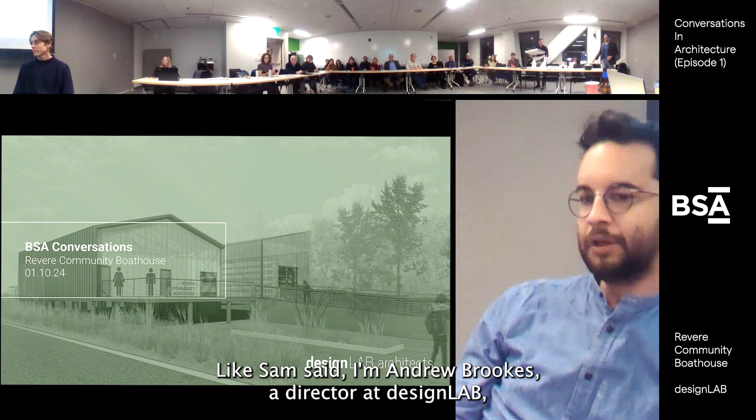So briefly, this is a pretty small project, but it is very important to the city of Revere, and it's also part of a much larger and very ambitious project that the city has, and we'll go over all of that.

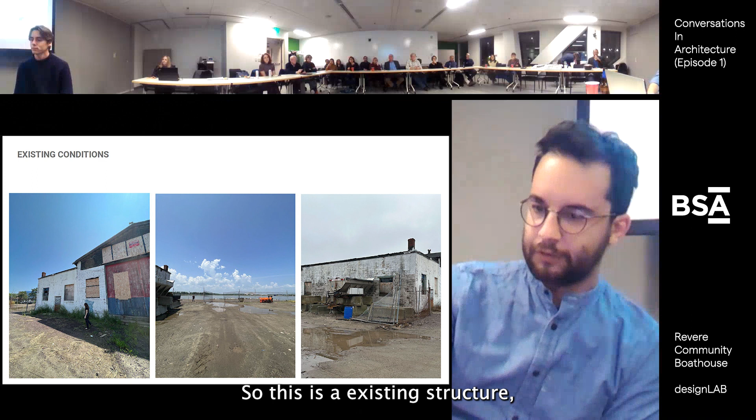So this is an existing structure, barely, and there's a lot to talk about in terms of what's existing and what's there to be removed. It's an existing brick building. I think nobody's been in the building for maybe 20 years. So it's really used for storage right now. There's some parked cars in there, and vandalism - it's a good place to spray paint if you want to.

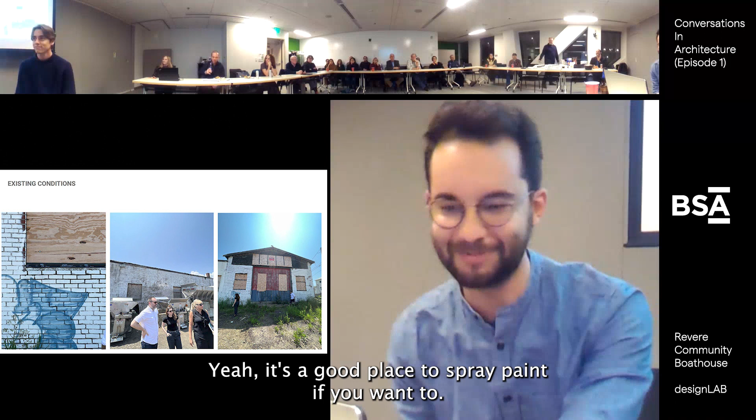There's the original building, which is the gabled building, and then there was a CMU addition put on the side, which is this middle building. There's heavy deterioration everywhere - basically anywhere you look, something's deteriorating inside or outside.

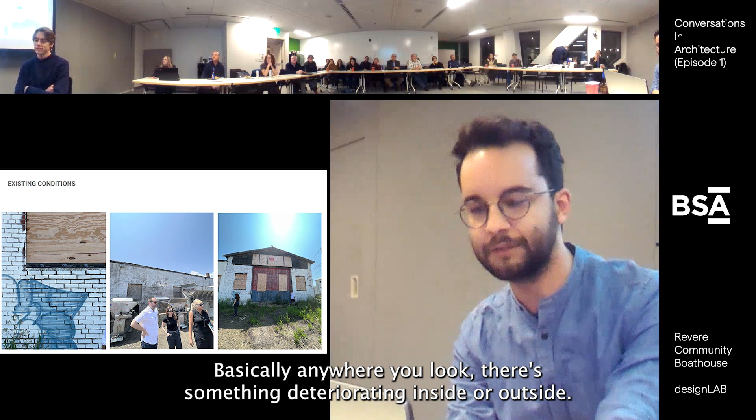This is the inside. It's currently storing some sort of oil truck or something. There is a lot of nice detail in the building - a lot of artifacts from the original character and the original program of the building, which was a boathouse. They used it to repair boats.

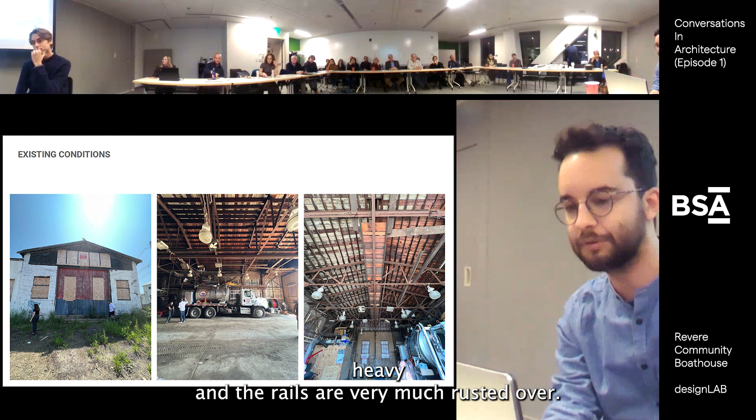There's rails in the floor that used to go into the water so you could bring boats into the building. There are these huge sliding doors that are incredibly heavy, and the rails are very much rusted over, so you can't actually move the doors very well. But there's all this nice detail in there that doesn't exist in too many places except a well-deteriorated building - but it's all holding itself up. The brick isn't structural; it has a nice delicate structural series of members to it.

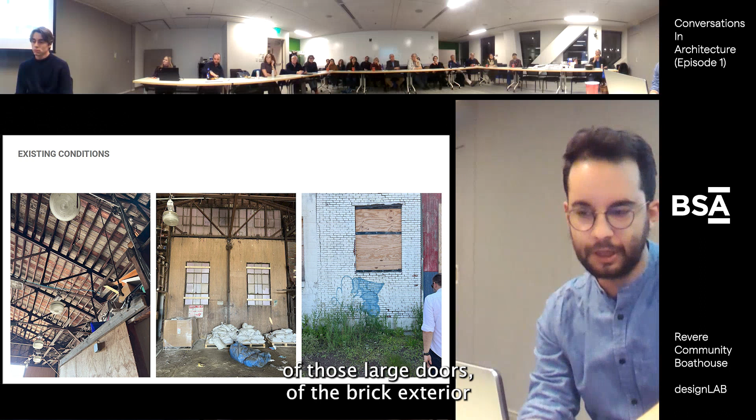Just some more pictures of the interior, of those large doors, of the brick exterior.

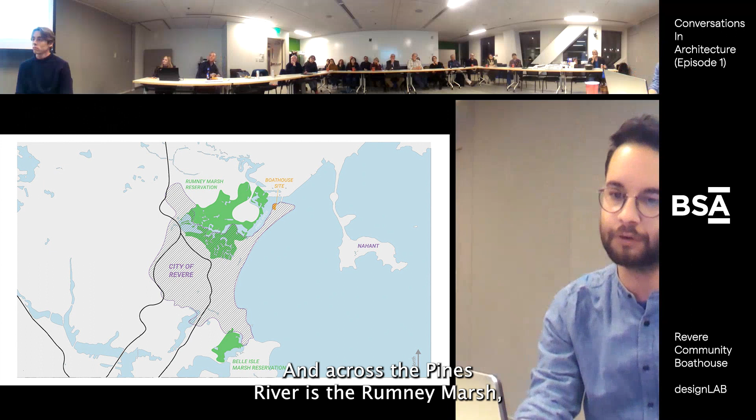I don't know if anyone knows the boundary of Revere - it has a pretty unique layout, kind of self-gerrymandered. The boathouse sits right on top of the wing that sits between the ocean, the bay, and the Pines River. Across the Pines River is the Rumney Marsh, which actually has a deep history and is very large and quite beautiful. There is a very large recycling plant or trash plant right in the middle, unfortunately, but the views from the marsh, from the boathouse, are quite nice.

And then, of course, Revere also has the first public beach in the country, which is very close to the boathouse site. So there is a deep history to this site and to the city of Revere that has kind of slowly been lost or taken over by either climate change, industry, or the highway.

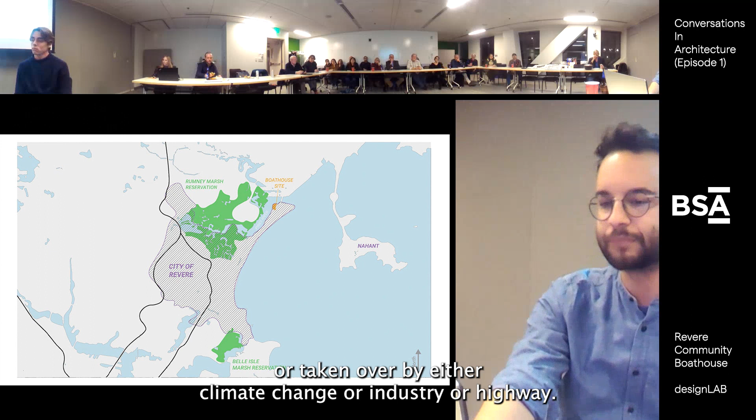So this is our site. The boathouse is here, a big white building. There was a boat yard next to it, currently storing lobster traps, which are amazingly part of the project. That was something we had to deal with.

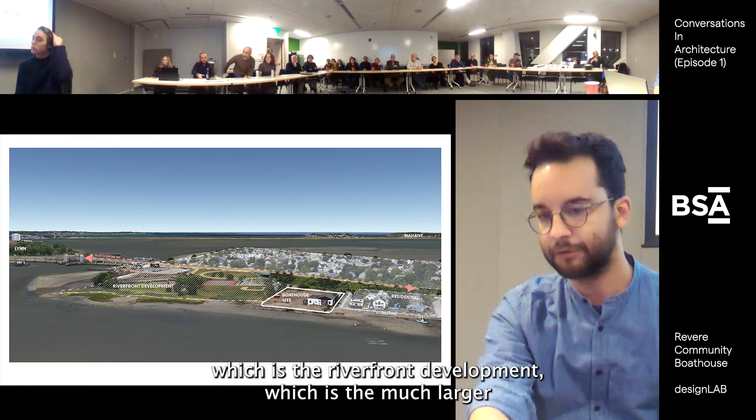Then there's a soft residential neighborhood next door on the right. There's the North Shore Road, which is overwhelming and separates the neighborhoods, and it's quite hard to access the neighborhoods, the boathouse, and this larger site, which is the riverfront development.

This community building is just a small part of that larger project. Our scope of work is actually just the footprint of the building and the addition, but we have to consider the wants of the rest of the site and the requirements of the rest of the project, because it's very ambitious and a big part of the future of the city of Revere.

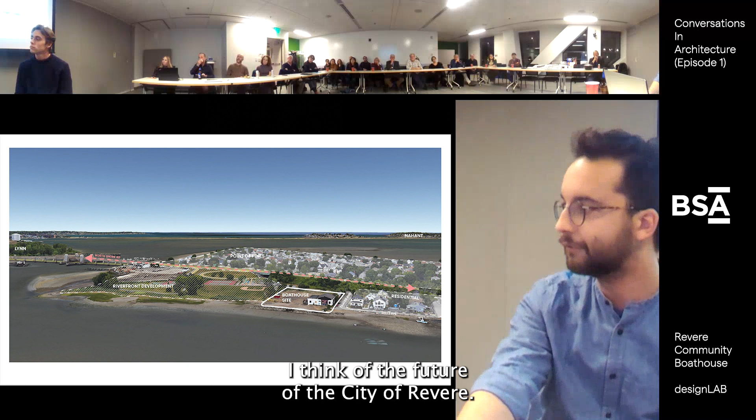So this is the view from the other side. You can see our building here in the middle and the Pines River. And of course, the Rumney Marsh is overwhelming the rest of the views there.

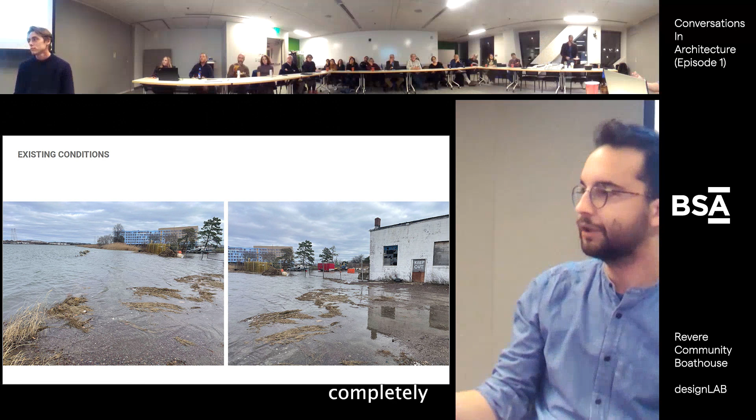These photos are actually from this morning. So this is the addition here. This is a bit before high tide, I think these were taken at 10:30. High tide was at 11 o'clock. The whole rest of the neighborhood was also underwater twice this week. So it's a huge problem.

It could ultimately take over the rest of the city, or at least this neighborhood. And this building has already been taken over by this effect. So the city has much larger plans to solve that flooding problem with revetments and solutions.

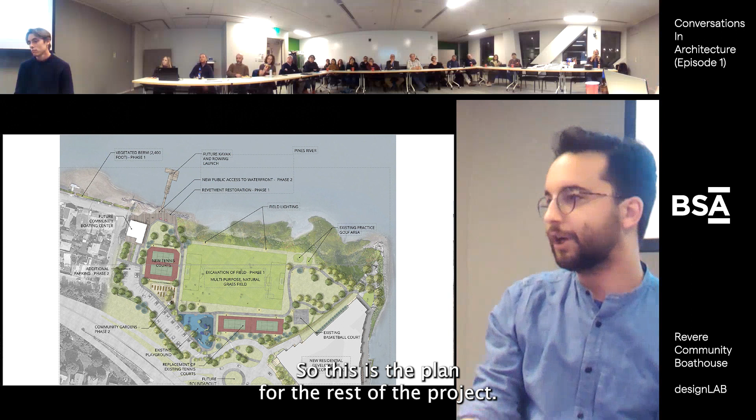So this is the plan for the rest of the project. We were not involved with this planning, but it's very ambitious and also kind of wonderful. They took on this amazingly large project to save this neighborhood from flooding, as well as provide extremely needed community amenities.

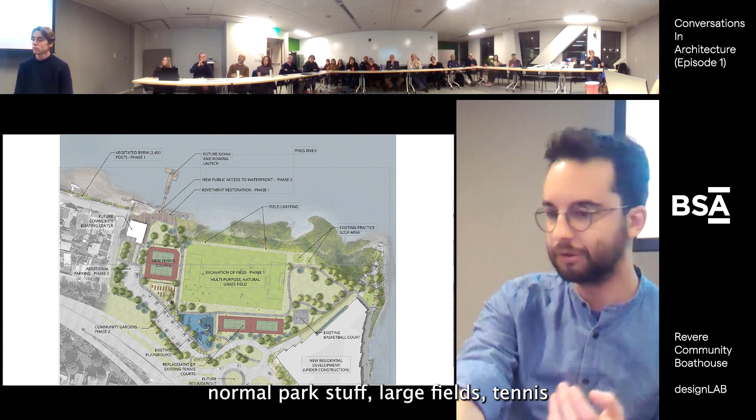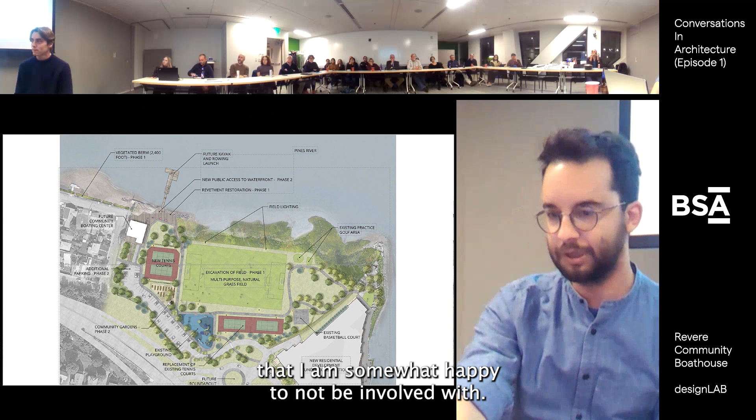Kind of normal park stuff: large fields, tennis courts, parking, access to this site, and new residential development. But the hardest part is building the vegetated berm up here, which comes right to the edge of our building, to protect the rest of the neighborhoods. It's an amazing permitting process that they're going through, which I'm somewhat happy not to be involved with.

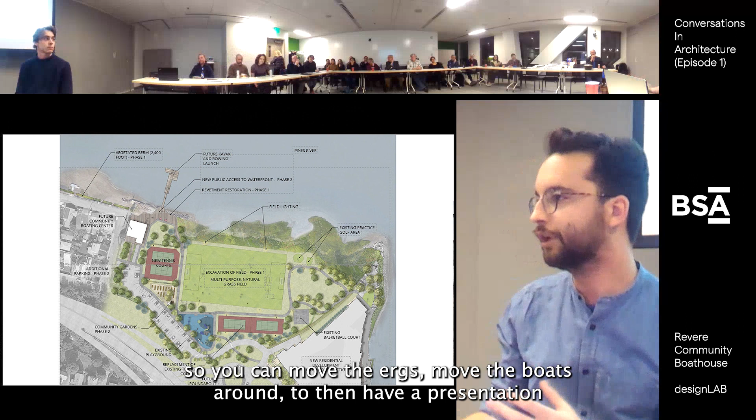Our project is this small white building here, connected to these raised platforms and a dock for rowing boats, kayaks, and potentially sailboats as well. That's the program of the building: a community building that is mostly a boathouse, but can be flexible enough to have an event like this inside, where you can move the ergs and boats around to have a presentation within the building.

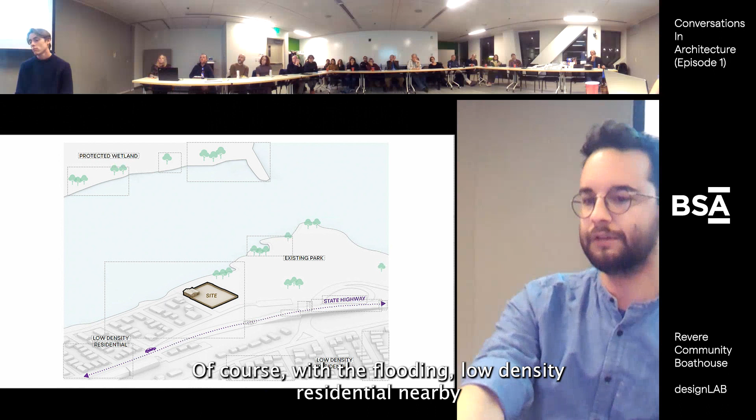But we always look at the site before starting the design. So we have this low-lying site with the flooding, low density residential nearby, existing park on the other side, but none of it's really activated. It's all cut by the state highway, which makes it very difficult to access.

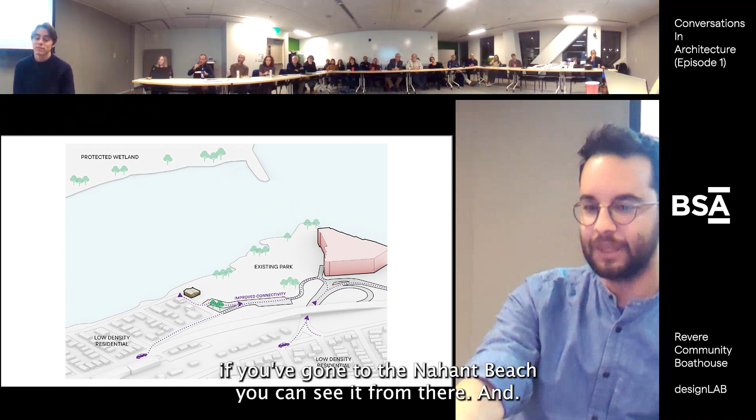So the city is working on a large development on the far side, which if you've driven up this road, you've 100% seen. If you've gone to Nahant Beach, you can see it from there. That connectivity is hard, and bringing all those people will be difficult, so they're going to improve the connectivity, which will provide our project with significantly more access and pedestrian traffic.

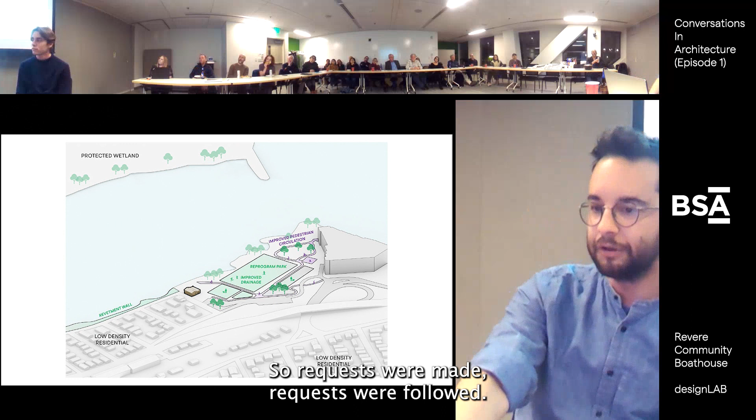There'll be new program on the park, new accessible, much needed program. Of course there was a large community process involved, so requests were made and followed. There's also the revetment wall, the vegetated berm, which was not a request but was needed, and was actually pushed back against by the town, but is much needed to save that neighborhood.

And then you can start to see how our building sits right in the middle of these improvements, and it almost starts to act as a gateway.

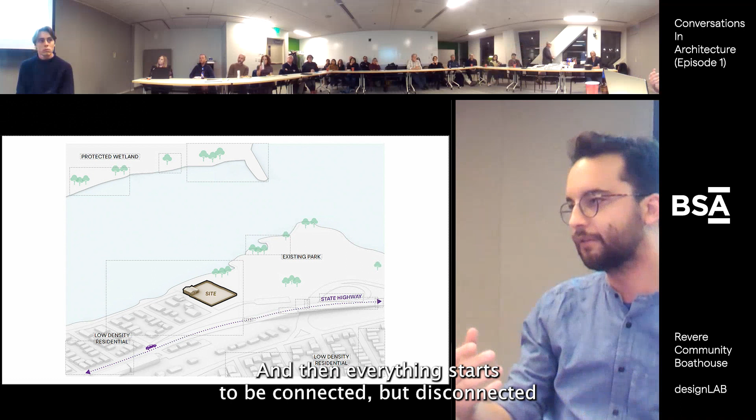Gateway to the water, gateway to the parks, a gateway to even the residential neighborhood. And then everything starts to be connected, but disconnected from the highway. So it's starting to bring everything together, and we start to see this community room boathouse as this gateway, or this opening into the park, or from the park to the rest of the neighborhood. And that's how we started to...

View this project. It's just an interesting juxtaposition between the new and the old, just like any project, but it's exciting to see.

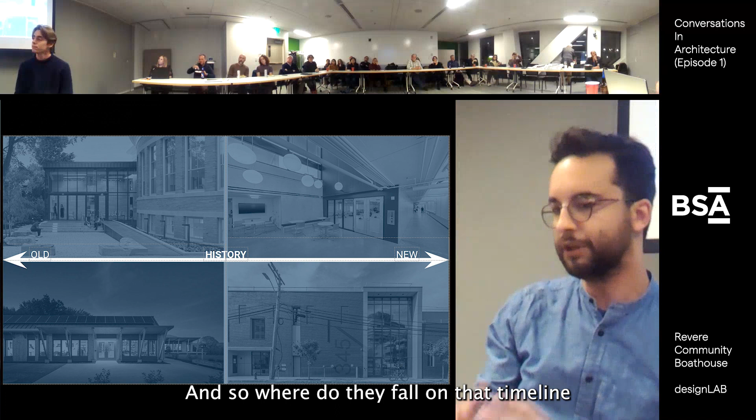But then we put the designLAB layer on top of that, and how we view most of our projects. We work on a lot of historic projects, or a lot of old projects. Historic and old may be different, so where do they fall on that timeline? That's that disposition, and then also where do they fall within the environment of constructed or organic? We've classified those four quadrants into historic, modern, natural, and utilitarian. And nearly all of our projects fit into this. I like to think that it's not post-rationalized.

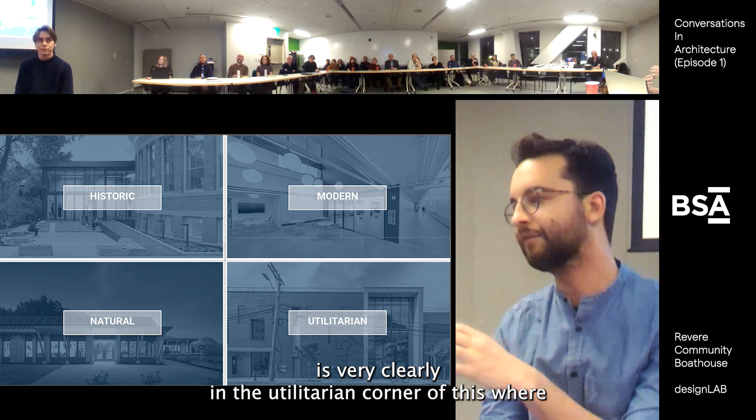And this project is very clearly in the utilitarian corner of this, where it wasn't built for architecture, it was built for a need. So there's a lot of utilitarian qualities to the building, but there's not a lot of architectural necessity currently.

So now that's kind of the overall view of a bit of how designLAB looks at it, a bit of the site. Rand's going to walk you through the massing and the design a bit.

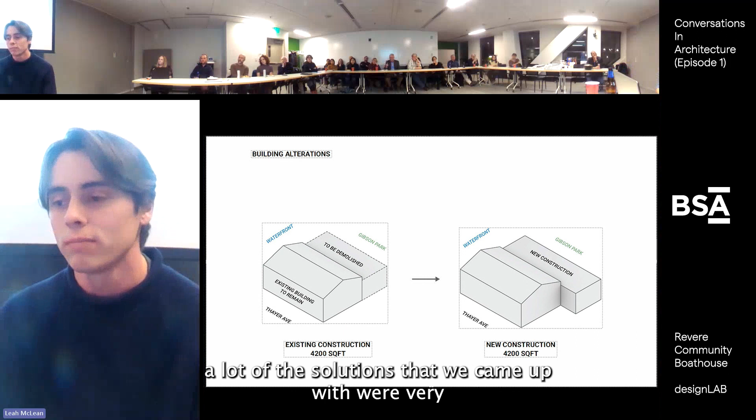Yeah, so speaking towards the utilitarian aspects of the building, a lot of the solutions that we came up with were very utilitarian and pragmatic. So here you can see we already spoke about how the CMU addition that exists currently, that's going to be demolished, and we're going to put a new volume that's roughly the same square footage, but is actually a little bit skinnier but longer.

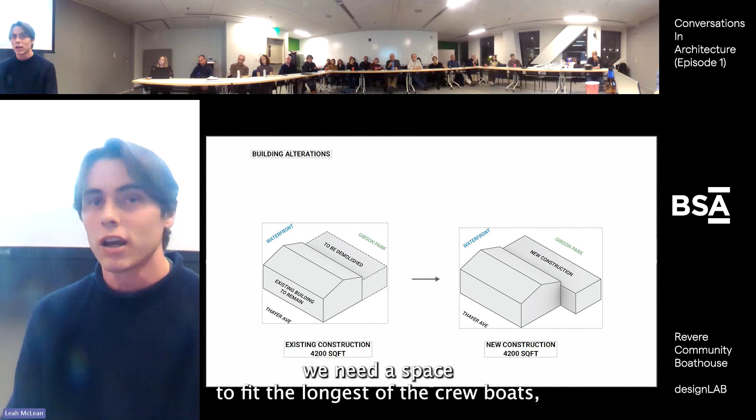And the reason for that massing is because we need a space to fit the longest of the crew boats, which I think is like 60 something feet long, so pretty long. That was the main driver behind the addition. And we'll get to why the addition.

Here you can kind of see, you guys saw the photos. Brooke said barely an existing structure. All of the masonry was basically unsavable.

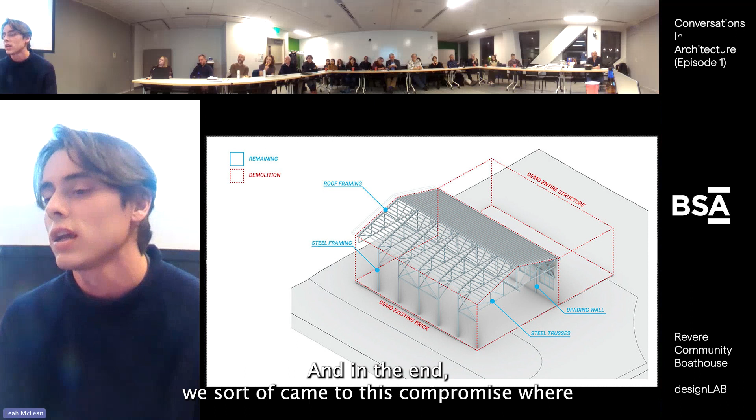We went through a series of iterations trying to see how we could save the brick and whether that was really worth it for us. In the end, we came to this compromise where we wanted to keep the stuff that was in good condition. Since the masonry brick wasn't structural, that gave us this opportunity to save what's actually integral to the building, which is the steel structure and the interior brick wall.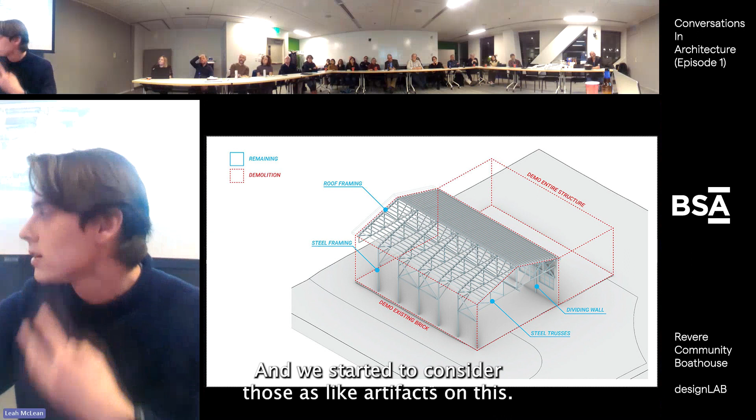So we get to actually save some of the utilitarian aspects, the very core of the building we actually got to save. And we started to consider those as artifacts almost inside the building. There's hooks and rails and stuff that you can ultimately see the story of.

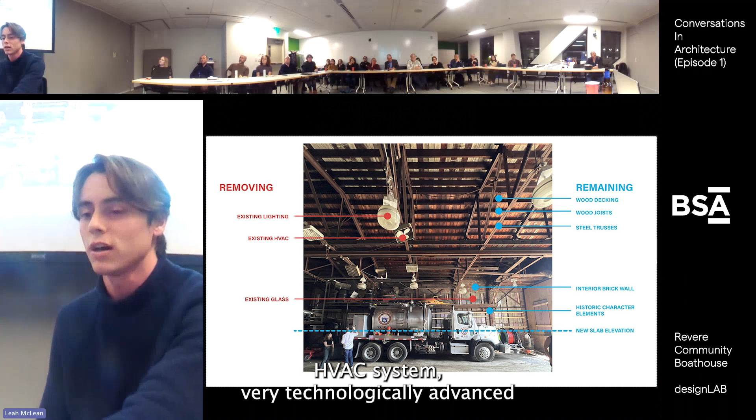Yeah, so here's some photos of just the interior, and you can kind of start to see some of those artifacts, like very nice steel trusses, very nice roof decking, very nice HVAC system, very technologically advanced, state of the art.

Yeah, obviously the lighting and pretty much everything comes out except for what we thought was integral to the character of the building. And then you can see our dotted line here where we actually had to raise the slab elevation by 5.5 feet due to the flooding.

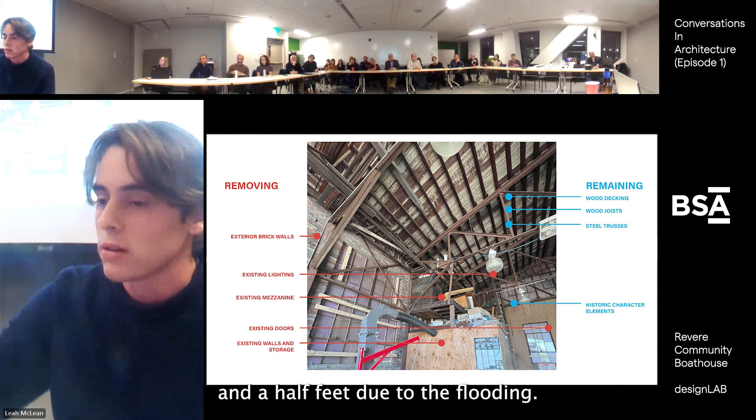Yeah, so here you can see some other elements, start to see some of these artifacts. There's all sorts of hoisting mechanisms and pulley systems and stuff. A big part of our design process was trying to keep everything that we could.

Obviously the plywood walled bathroom had to go. We fought to save it, but...

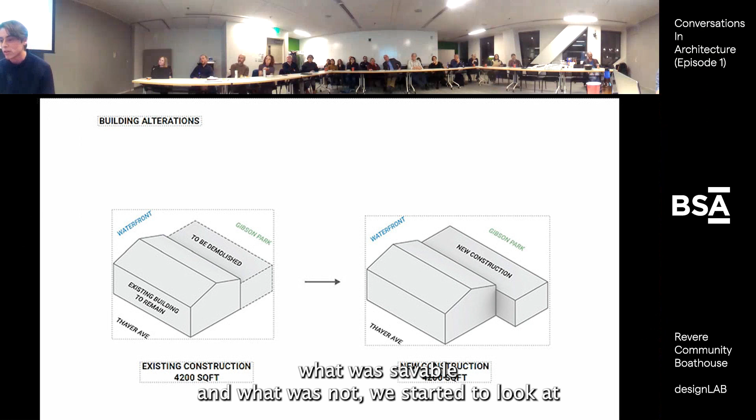Yeah, so after we kind of figured out what was savable and what was not, we started to look at how we were going to program this space, and how we were going to fit the things that we need in the building. And so we came up with this...

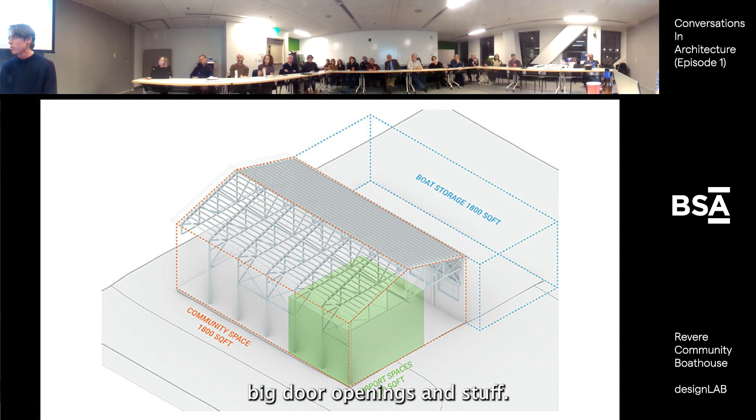Compact volume of basically all of the support spaces for the community space and the boat storage. We sort of just fit them here. We initially went through a couple of iterations trying to work around some of the big door openings and stuff, but once we realized that the exterior walls were basically shot, we kind of got a break in that regard. We're able to manipulate the interior space a little bit more. So you can see how that works out in plan, with all of our support spaces tucked away nicely in the corner.

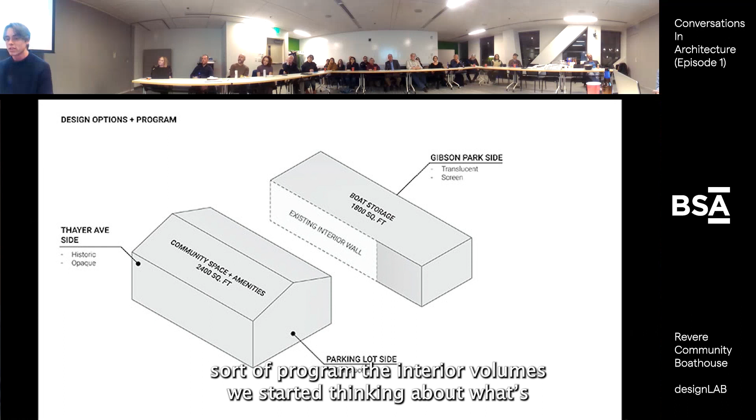After we programmed the interior volumes, we started thinking about the character of the exterior of the building. We came up with a matrix of different options, because we got feedback from the client that basically said they don't want this to be industrial.

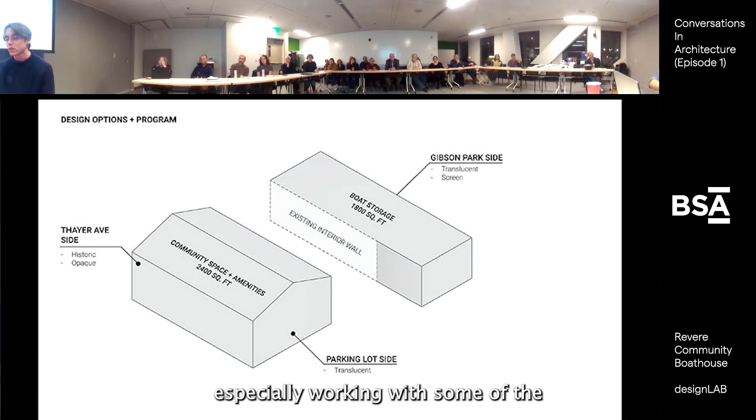We're calling it utilitarian, but I think there's a distinction between those two. So it was something we had to go through internally and figure out where we draw the line between industrial and utilitarian, especially working with industrial steel and masonry materials. So we started looking at precedents in buildings of a similar character to ours, to see how we could work in different materials with what's existing.

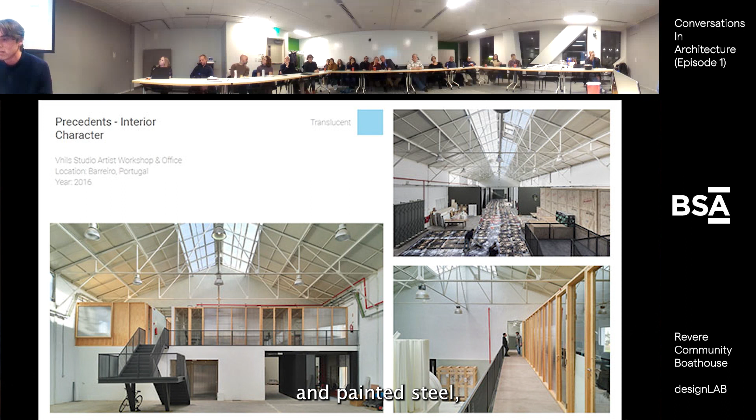We saw a lot of wood, a lot of translucent materials, painted steel. You start to get into brick. And this material really caught our eyes, like the translucent panels.

We presented that to the client, and the feedback we got was, yeah, we love it, it looks great, but this is a residential neighborhood. We need to really think about how the neighbors are going to react to that, and again, try not to be so industrial with the material selection.

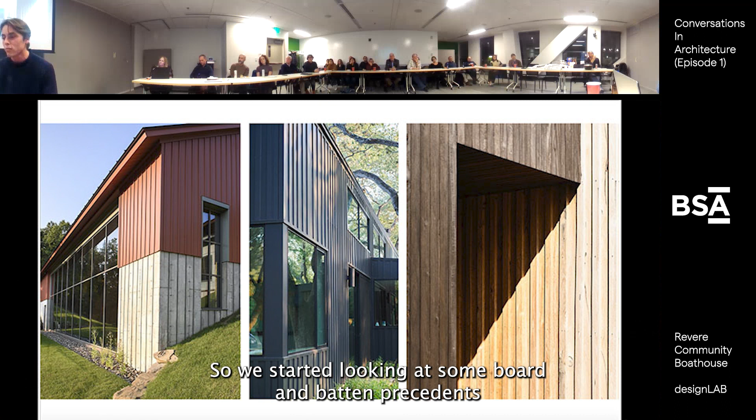So we started looking at some board and batten precedents, and we thought that fits in really nicely. That's kind of right on the line between utilitarian and residential. We looked back at a project of designLAB's that uses both of those materials quite well, I think, so we drew a lot of inspiration from that.

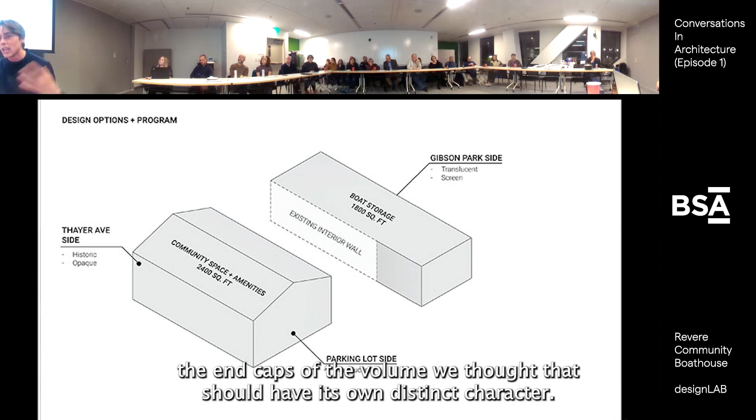So then we came up with this, basically thinking about the Thayer Ave side, which is the side that faces the residential area — we thought that should have its own distinct character. The parking lot side, basically the end caps of the volume, we thought that should have its own distinct character. And then the Gibson Park side, the elevation that faces the park, we thought that should also have its own distinct character.

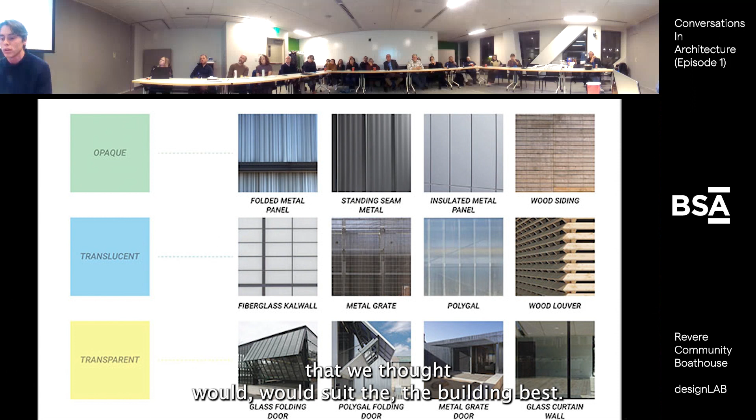So we came up with a matrix of transparency. We got some materials that we thought would work well within this matrix, and then we laid out the two volumes with different configurations that we thought would suit the building best.

For the community portion, we came up with something we called historic, which is basically leaving the Thayer Ave elevation almost as is, but giving it a new skin while leaving the character similar to what exists currently. The transparent ends, shown by the yellow, are the caps we were talking about — how do we treat those, do we want them to be transparent — and then a clerestory, obviously.

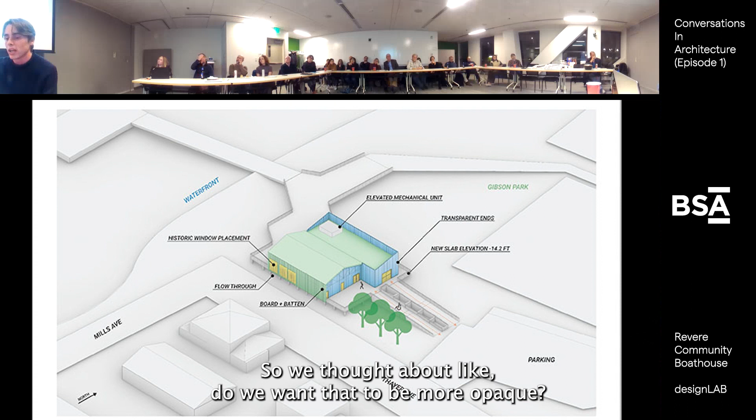Then we paired that with the character of the boat storage addition. We thought about whether we wanted that to be more opaque or translucent. And then we came up with an idea we thought was pretty novel: could we potentially screen some of the mechanical units and nastier things from the park space, so you're not inundated with HVAC units while playing soccer, walking your dog, or whatever.

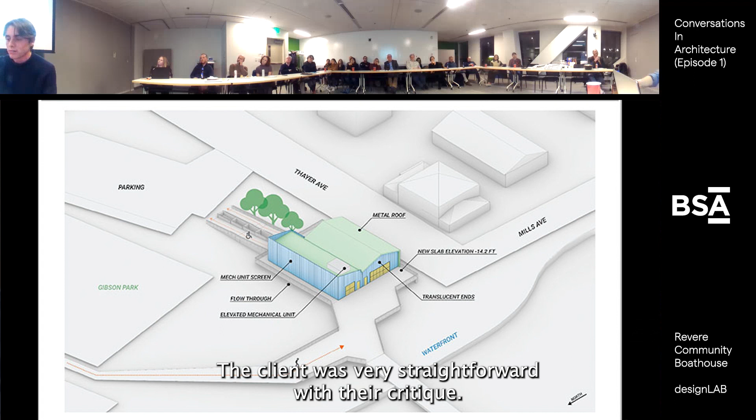We showed them to the client, and the client was very straightforward with their critique. They said they wanted a combination of both of these two options, so we ran with that and ended up having this screen that I just spoke about.

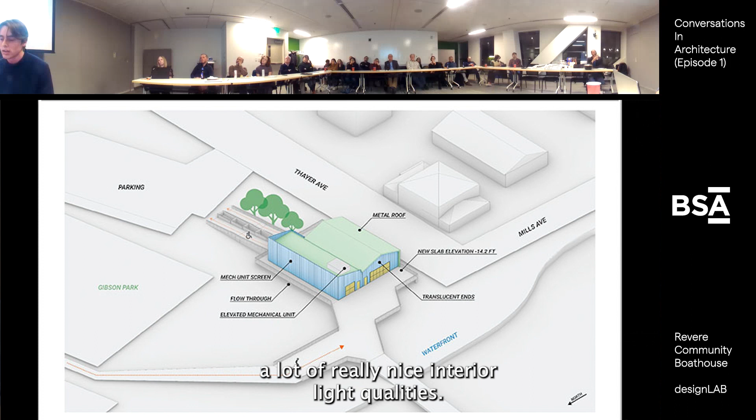We really liked the translucent end caps. We thought that provides a good outward-facing elevation, but also creates nice interior light qualities. And using the board and batten to face the residential neighborhood, we thought that was a good strategy, and the client really liked that.

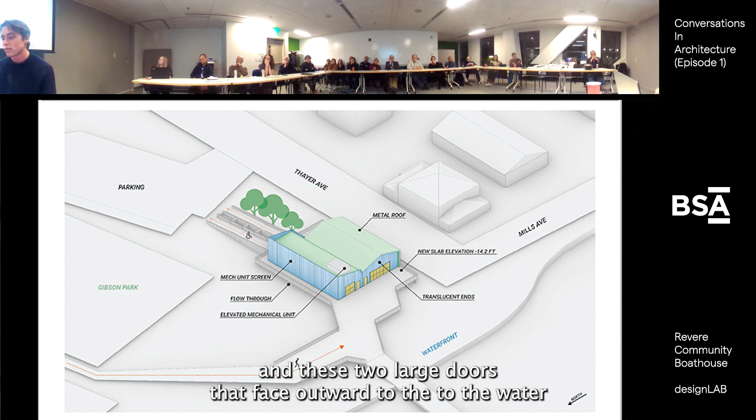Yeah, and then you can see this is the park side, right? So you start to see how that screen works, sort of hiding some of the uglier elements, the HVAC units, and these two large doors that face outward to the water and give people the views that Brookes was speaking about earlier.

So with these two, there's really two foundational facade parts. There's the residential side, and then there's the park side, and those start to come together with that chosen massing and composition, and they start to act like a handshake, where it wraps to the front, and the residential side wraps up to the front or to the top.

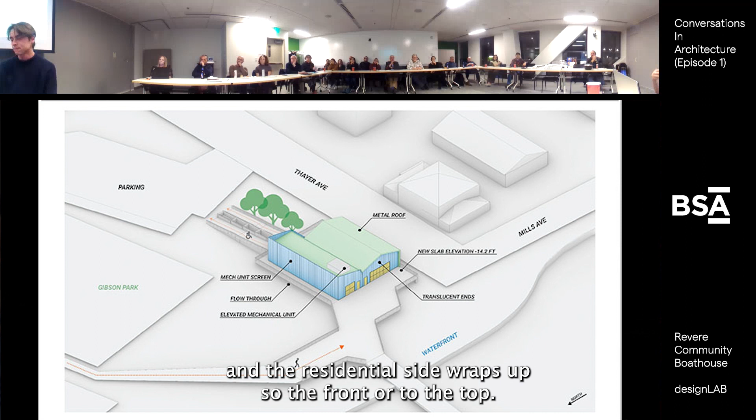And so we started to explore that a little bit with facades, but during a community meeting, we got a very strong not compliment, the opposite of compliment. They call that feedback, right?

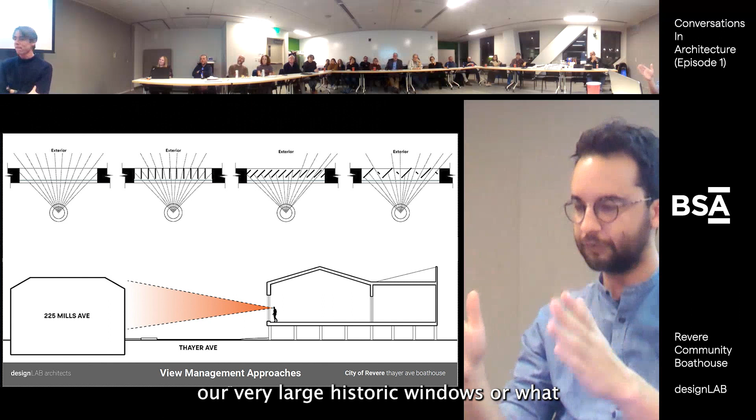Comments from the resident who lives at 225 Mills Ave about how our very large historic windows, what we call historic windows, recreating those windows in the same place that they were, would look directly onto this person's house as they do right now. And it was of course like, yeah, that's very concerning. It's a community room. There's gonna be a lot of people there every once in a while.

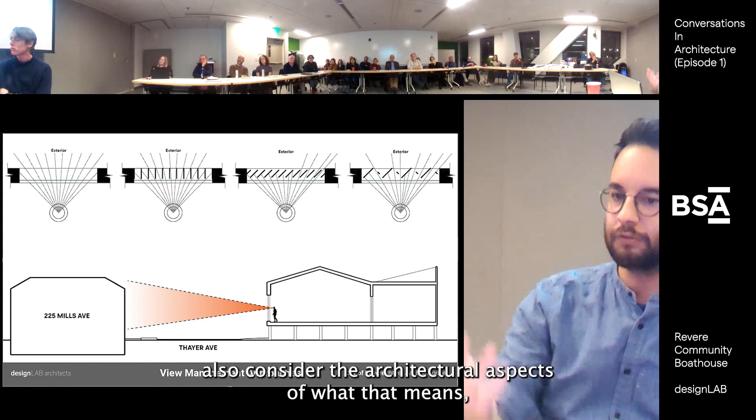And we should consider that very seriously. But we should also consider the architectural aspect of what that comment means in our response to it. It's also kind of architecture 101, shading and apertures and directing views. And it's a perfect example of how we can direct the views away from the residents straight to the water. We're able to do that with the angles we have.

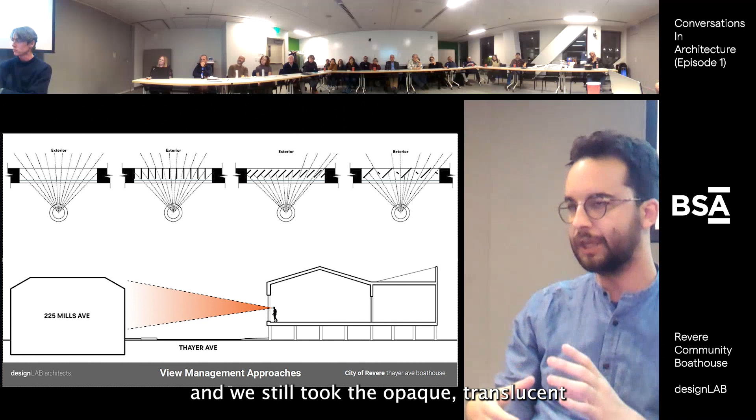And so we actually took a step back, and we still took the opaque, translucent, and transparent spectrum that Rand just walked through. But we started to dive into what the opaque could be and potentially how it starts to be more perforated maybe than just opaque with these windows in particular.

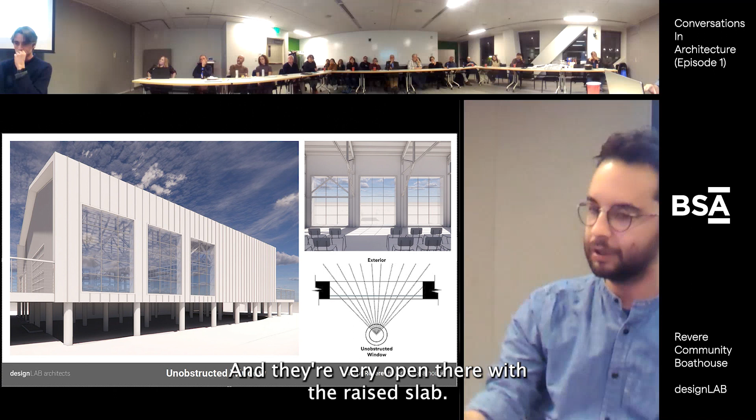So this is kind of where we landed with that board and batten and just those exposed windows. And they are very open. They're with the raised slab. The slab goes up exactly to the sills, which was perfect. But it's floor to ceiling. It's taller than a person, so somebody could look right out at 225 Mills.

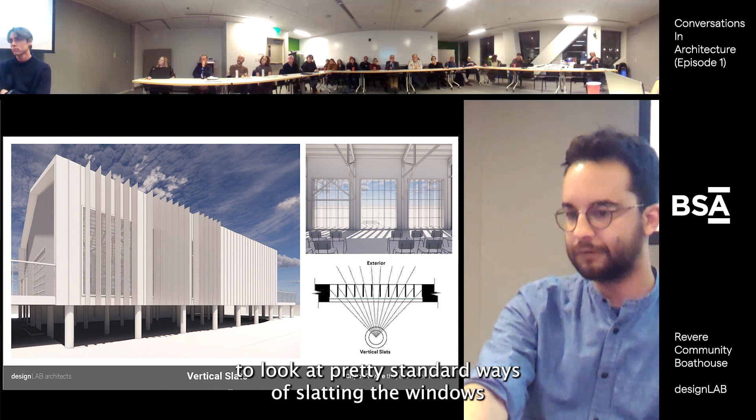So we started to look at pretty standard ways of slatting the windows and cutting that view down significantly, and just rhythms and depths, which in all honesty, they all look great. We were happy with almost all of them, but then starting to guide those views actually away from the residents and towards the water, which became successful really quick.

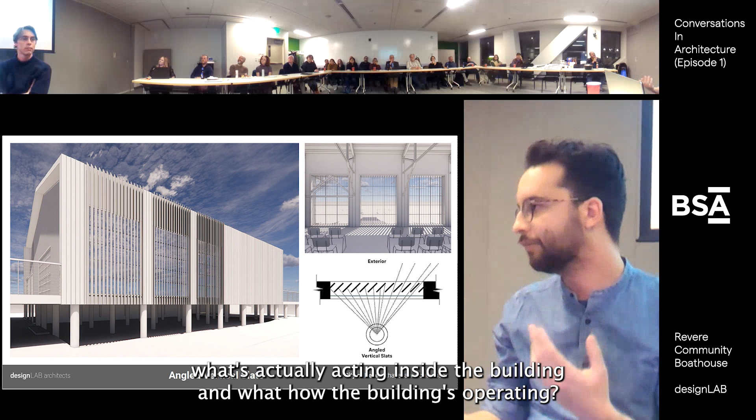And just kind of the rhythm of that. But then taking it a step farther is how does it become symbolic of what's actually acting inside the building and how the building's operating. It's a perfect opportunity to do that.

So these are kind of silly equations that we put together. We had some more as well that were even more representative. But the idea of an oar took off because it's quite similar to actually a wood slat or a shingle. And this is actually an idea that we explored, cutting a shingle into a shape, an idea we explored in another project.

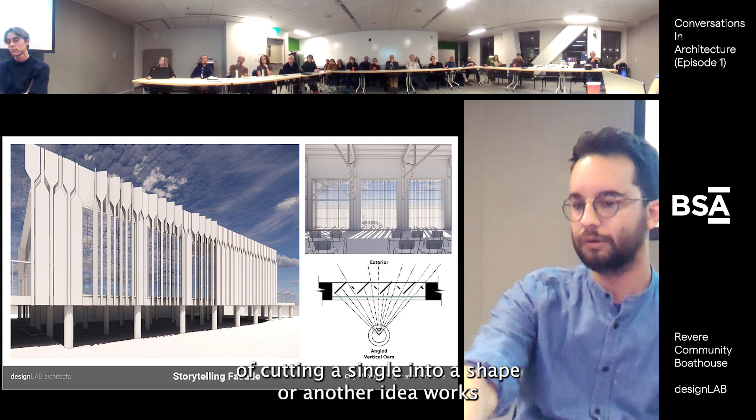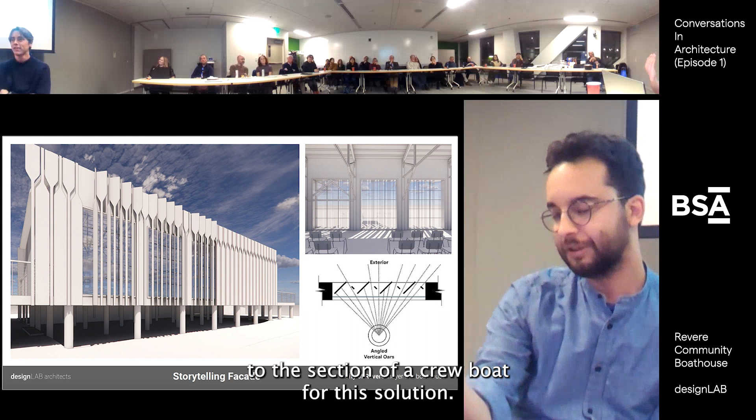And so we were looking at boat construction and the shape of these blades, which Sam knows a lot about as a rower. It was really interesting to explore all of this, and actually our details, which Brad helped us with - so thank you, Brad - actually look surprisingly similar to the section of a crew boat for this solution.

But so we started to get really representative about it, and a little too representative, but how that could start to act and operate, and the kind of aesthetic qualities that may cause. And it was all really interesting, and we ultimately landed on something that's quite a bit more abstract, but from a certain angle, it still represents kind of that oar character.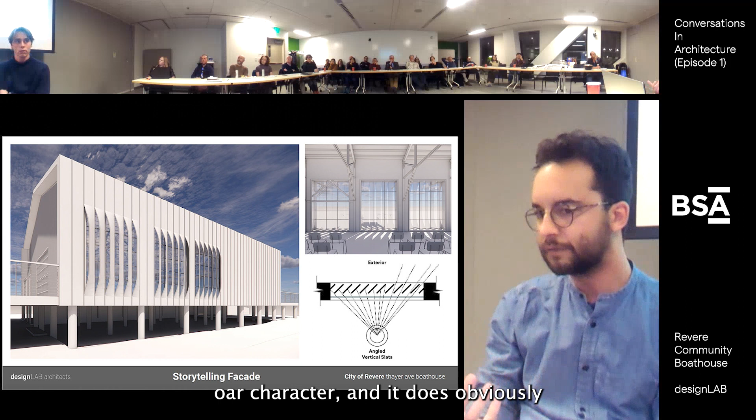It does obviously somewhat reminiscent of like fish gills, but the way it's built and the way it guides the views is like exactly what we wanted, and it fits in with the board and batten rhythm really well. So this is kind of where we landed with the shades of the windows.

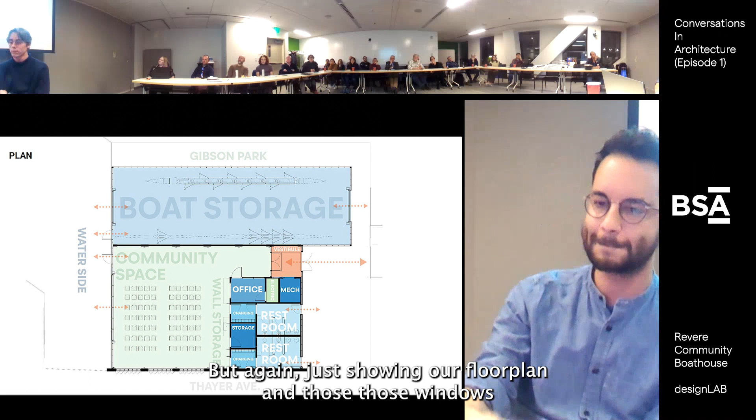And you can see, we'll show you the interior view and how it guides those. But again, just showing our floor plan and those windows here, how the community space looks directly out onto that, but from the right angle, it looks directly out onto the water and actually extends the view of the water side glass.

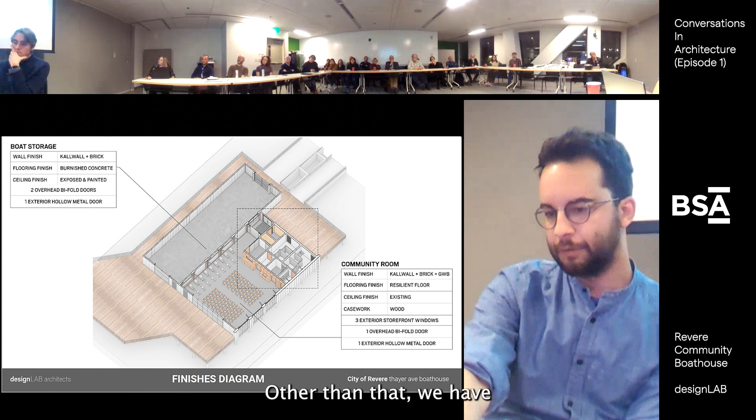Other than that, we have subtle colors and subtle materials. The only real material with texture is wood millwork, which they use for storage, multifunctional storage, and movable ergs, which are the rowing machines that everybody loves.

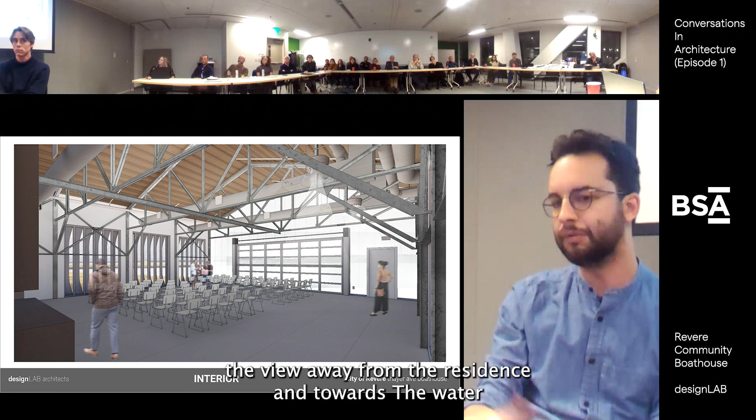This is the view of what we've been calling the volume on the interior, which is just inserted and only delicately touches the existing steel, so it doesn't rely on that much. From the other side, you can see how it guides the view away from the residence and towards the water, extending into that large bifold glass door.

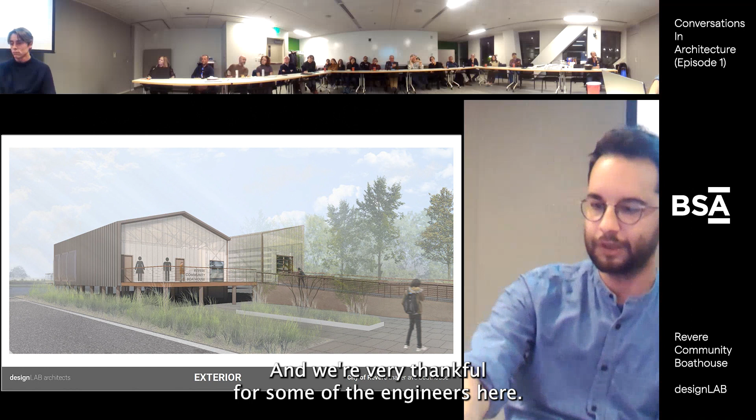Just a couple of views from the exterior. You can see it's raised up 5 feet, all on pillars. We have to leave that all open to allow the water to come through. That's a FEMA requirement for the permit, which is quite difficult, and we're very thankful for some of the engineers here.

And then everything's incredibly accessible, of course, as a community building. There's large ramps coming from all directions, as the whole park is almost raised up, and there's large decks that are raised up as well, outside of our scope of work.

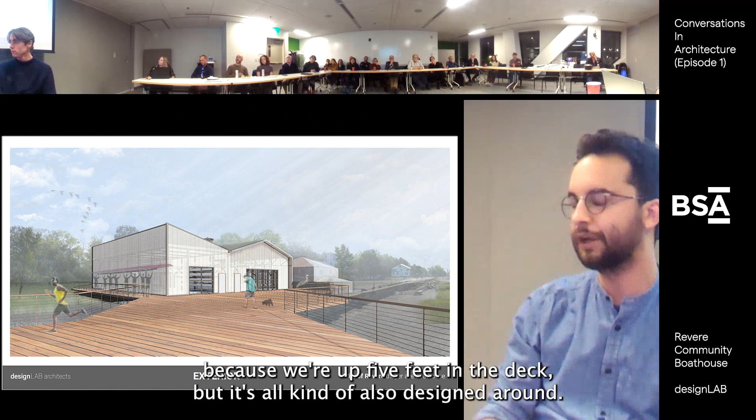From that deck side, it starts to squat down a little bit because we're up 5 feet at the deck. But it's all designed around the ability to move a 57-foot boat with 8 people carrying it. Kind of like how the whole world is designed around being able to ship something in a truck, this is designed around being able to move a 57-foot boat.

So, yeah. That's all we have.

Thanks, guys. Can I ask a question? Yeah. Easy one. Nice presentation.

I'm curious, as a community boat facility, what all are you storing? Just rowing, competitive rowing shells or kayaks, or ocean-going rowing boats, which are now very popular? Any kind of small sailboats? What's the requirements for boat storage?

In the boat storage room, we're accounting for it all based off of the 57 to 60-foot, 8-person shell. But then we can store all the way down to a 1-person shell.

Officially, the city is leasing the operations out to an operator. The likely operator is a community rowing program, but it's set up so that if they change their mind, they could do it for a kayak program or any other sort of boat. I think they have plans to rent kayaks and other sorts of boats that wouldn't be stored in the boat storage bay, because those are smaller and more weather resilient. So they're really trying to keep it ambiguous in terms of exactly what kind of watercraft can go in there, but it's designed around rowing racing shells because that's the most likely tenant and the most challenging storage requirement.

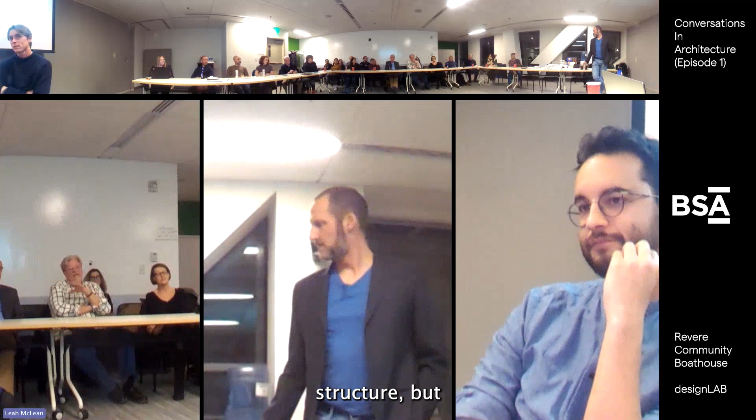Yeah, because I'm just thinking, the beauty of it's fantastic that you're saving what most people would tear down as a beautiful industrial structure, but the whole armature scaffolding of the boat storage as a flexible unit could almost be the modern analog to a lightweight metal shed, and could be a really beautiful interior entity in and of itself with some view through its translucency. Just a thought.

Yeah, that's interesting. The boat storage facility, we haven't talked about that much. It's an unconditioned space with a dry sprinkler system, with a really simple structural grid that's based off of the existing structural grids. These buildings aren't supporting each other, I believe, so there is an expansion joint between them.

It's really straightforward. One of the goals we had was actually to be able to see the structure from the exterior as a bit of a shadow, and that's what spawned a little bit of the translucency conversation. So we have some cross bracing in there so that you can see a bit of a discussion between the structure and the facade.

Curious if you're working with a landscape architect, or are you really responsible just for the building and the deck out to the water? So we're actually not responsible for the deck, but we do work with a landscape architect on the much larger project that we work really closely with. We comment on our designs, they comment on theirs weekly, so that's been the process, but it's not as much of a direct conversation as a typical contract would be.

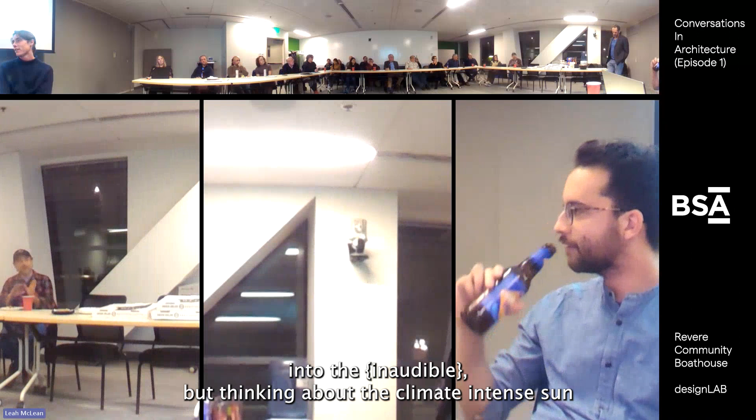Thanks for the presentation. Thinking about material selection, and not going too far into the HPD, EPD side of it, but thinking about climate, intense sun, freeze thaw, the humidity, and growing up not too far from there, my sister had a house not far from here. It's really hard selecting the right materials to attach to an existing Cape Cod style house. So I was wondering what type of selection of materials, like what you go through for that.

We have a pretty standard wall assembly on the opaque wall, with 6 or 7 inches of insulation, pretty significant amount for the new codes as well. It's just a resilient exterior material, because towns need lower maintenance buildings that can last a long time. So that was our main outlook, how to give them a low maintenance facade that will last a while and withstand the weathering of being so close to the salt water.

We have the advantage that it is a completely new skin, so we're not attaching to any existing elements, at least that'll be exposed. So we have a fully new skin, as Brooke said, we got a completely new backup, and then all the materials on the outside are resilient.

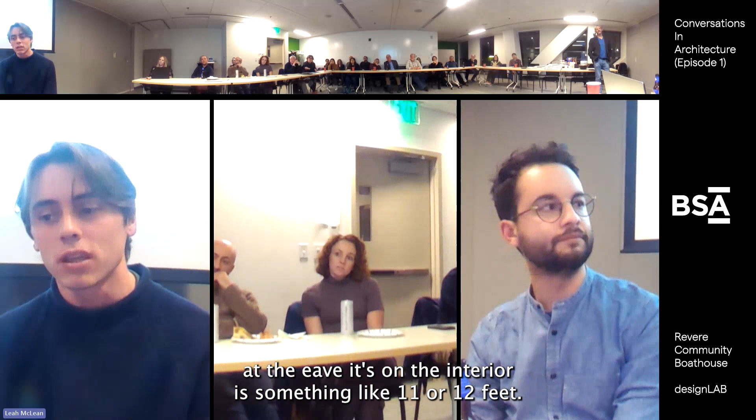Great question, I appreciate you asking that. Following on that, since you're raising the slab, what will that lead for your height in that space? It's still pretty tall—I think even at the eave, on the interior it's something like 11 or 12 feet. It's just quite a tall space, and the slabs will be at the same elevation for both portions.

Can I ask what set that? Like what set the 5 foot—was that us or was that given? The 100-year flood—it's the 2070 100-year flood. So it's quite a bit in the future, and a quite extreme situation in the future.

Going back to the materials, it's like a resilient building that the city doesn't really have to take care of, and they're still asking for resilient materials on top of that.

I really appreciate all your studies on the residential side with the windows and everything. Did you have a chance to take a look at the other side, the east side, the park side of it? Is there anything happening on that transparent, semi-transparent zone?

I think the fun thing about that facade is we studied what sort of light qualities we wanted to have, and what we realized is that if we did a translucent screen, it actually creates a very nice shadow with the stacking of the boats. So from the park side, you see a silhouette of the boat stack—you don't need to do anything else with the building because the stacking itself does it.

We didn't include any pictures, but we went and visited a number of boathouses, and when you stand in those boat bays with boats stacked and the racks supporting them, as Bob was talking about, it has a lot of character of its own, not so dissimilar from the old trusses in the existing building. So it's an interesting comparison and counterpoint to see both of those things through these translucent facades.

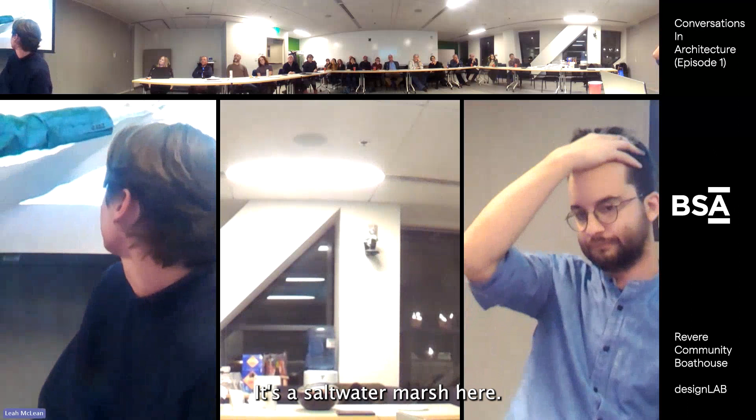But what they're doing, folks, is kind of amazing. They're basically building a new seawall that wraps this entire thing. It's covered in vegetation here - it's a vegetated berm, part of the deck structure here. It's a vegetated berm here, it's a saltwater marsh here, but they're basically raising up everything in here and creating a wall here, because all of this street, all of these houses are below the flood line. So they're raising everything new up and creating a wall around everything existing, and creating giant chambers under the field to capture stormwater - all the rainwater runs into these capture tanks, like a sponge, until the sea level recedes and then it gets pumped out.

Yeah, it's an unbelievably ambitious project for a town or city like this.

Just a quick question, what's the estimated completion of this project? Not just yours, but the park, everything. It's a great question, I don't think anybody can answer that honestly. There's a lot of phases - you can even see some listed here. So we're actually not entirely clear, and the city's not entirely clear, on when this building fits into the phasing of the rest of the project.

But the first thing they have to do is clean all of this. They have to remove all the soil and clean it, which is an enormous effort and extremely costly. But then they should really be able to hit the ground running, and that's kind of the plan with all of this in place.

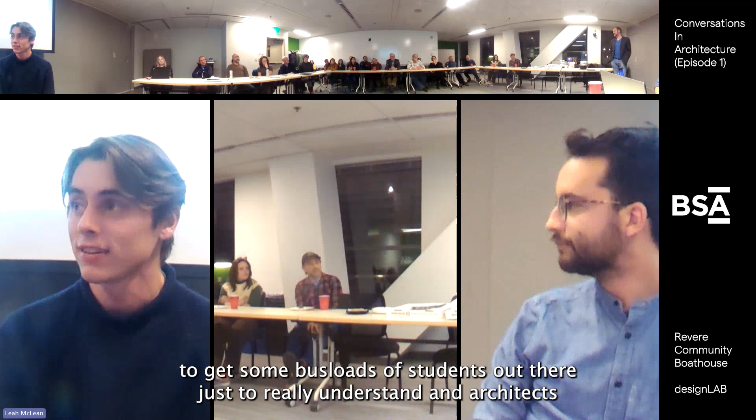It would be really interesting - obviously there's an educational opportunity during the project, when the tanks are going in, when the building's going up, when the wall's being put in. I don't know if the BSA can organize, or one of the local universities, to get some busloads of students out there, and architects and scientists, to really understand how this is happening. Yeah, that'd be super fun.

So they're actually removing the dirty soil, not just capping it? No, they can't. And on other projects I've said naivety is a great tool, and here it's an amazing tool, because I think when the town kicked this off, they had no idea how difficult it would be, and they just kept running forward with it. So I've personally been very impressed with the city of Revere, and how ambitious they are with this project.

And it's fun to be a part of as well. I second that.